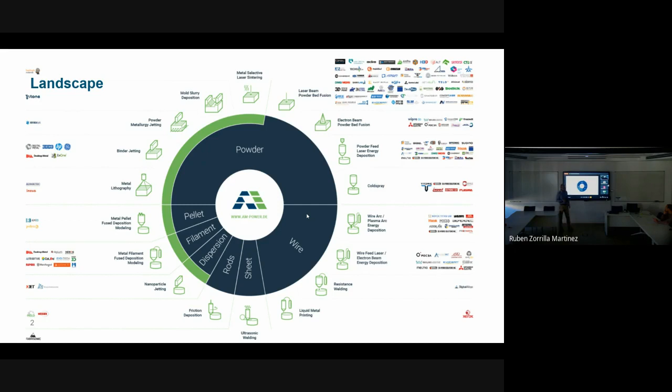For this reason, we started exactly from that place, targeting that market from the Altair side. But we are moving into other areas too - for instance binder jet sintering, where we also have a solver, but I'm not going to get into that in this talk.

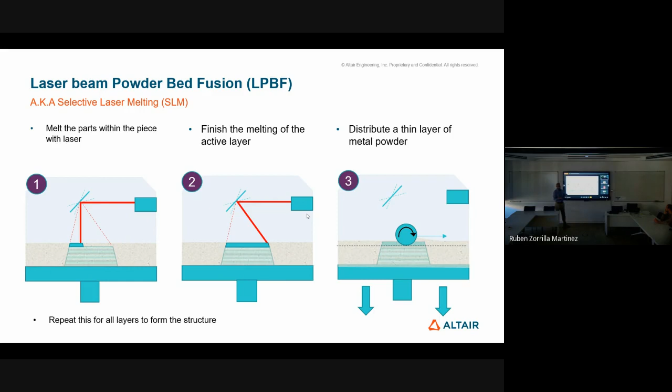So what is powder bed fusion, or PBF? You may also know this by the trademark SLM, selective laser melting. In a very simple description, you have a bed of powder. You start melting part of the powder with a laser, just the part inside the geometry you want to print. When you finish one layer, it goes down, and a recoater comes and puts another layer of powder. Then you repeat this for as many layers as you want until you finish the entire 3D print.

There are many peculiarities in this process. First of all, the recoater has a very slow movement. So there's a lot of time for cooling, which becomes quite important, and it increases a lot the time of the 3D printing itself.

There are many characteristics involved in the quality or final result of the 3D printing. One is the laser power and laser velocity - these control how much energy you are adding to the system. Then you have the layer thickness - a typical layer thickness is about 20 to 30 microns, so it's very, very thin, and this is a serious problem you will see afterward. The laser diameter is also very small, which makes it very difficult to achieve a high fidelity problem.

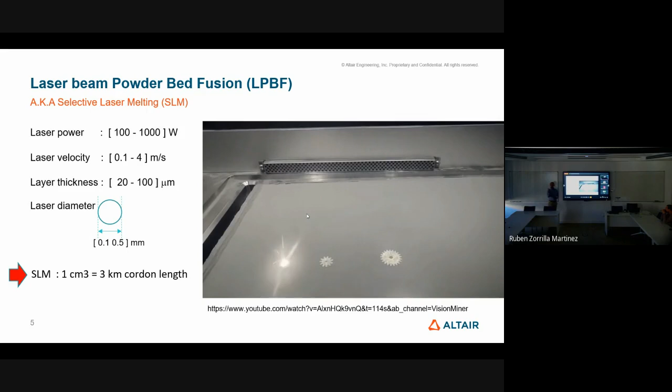Finally, just to understand the scale: if you are printing a cube of 1 centimeter by 1 centimeter by 1 centimeter, the path length is about 3 kilometers. Now considering the velocity is 1 meter per second, you can understand how many time steps you would need if you wanted to really calculate only a 1 centimeter cube.

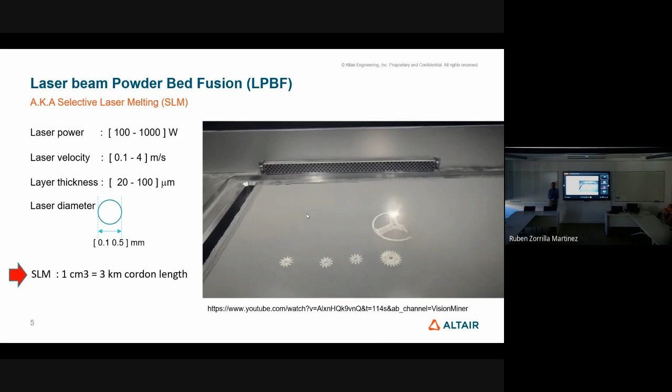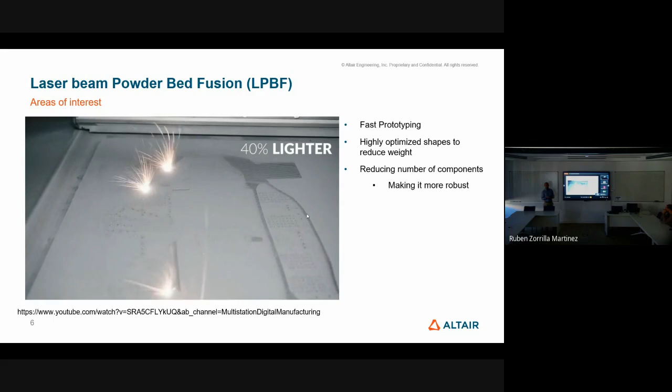You may ask, why is this interesting? In fact, this is not a cheap way of manufacturing. It's not comparable at all with casting or molding or other ways, or even machining.

But it has its own interest. First, for fast prototyping, because you want to test something, you just prototype it, usually even to prototype a mold and then create a real piece.

Another thing is to create very optimized shapes to reduce weight. This is important for aeronautics. For instance, here they claim 40% lighter. This is a brake for the Bugatti Chiron car, a very, very expensive car. They can do what they want, so cost is not important there, the effect is important.

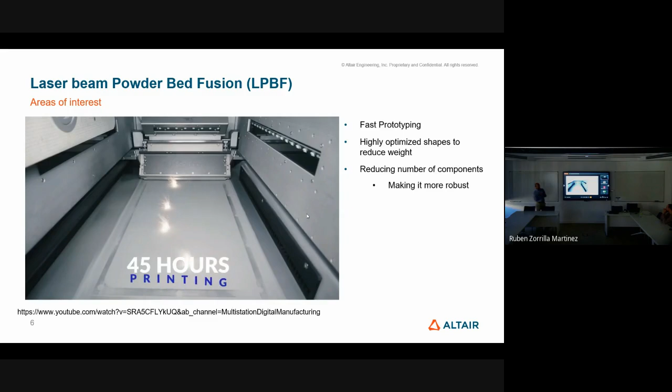Another thing that can change the balance is that large manufacturers claim they are reducing the number of pieces. This not only makes pieces more robust, because if a connection has 3, 4, or 5 pieces and you have only one, then the production chain also reduces to one. So you have much less people to contact with, making it more efficient.

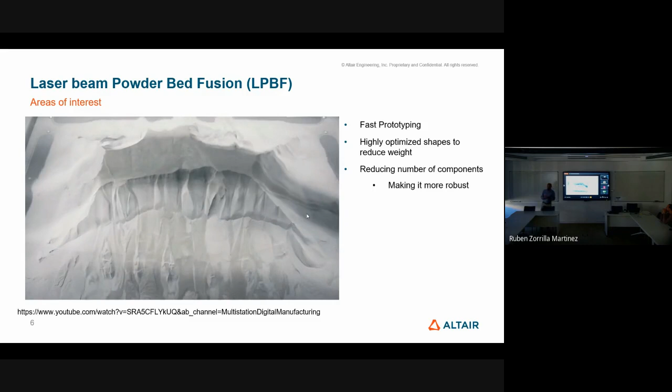But considering all of this, I don't think it can yet compete economically with other ways of manufacturing, but it has its own niche of use.

In theory, you can produce any shape with this technology, which is interesting. There are unique use cases — these guys create radiators, heat exchangers for Formula 1 cars, where efficiency and smallness are very important. It was a block like this, 2 kilos, that can refrigerate a Formula 1 car directly.

They said their ratio of surface to volume is about 4,000. It's very difficult to manufacture if you want a professional one. You can use lattice structures to reduce weight, creating very organic shapes that usually come from optimization.

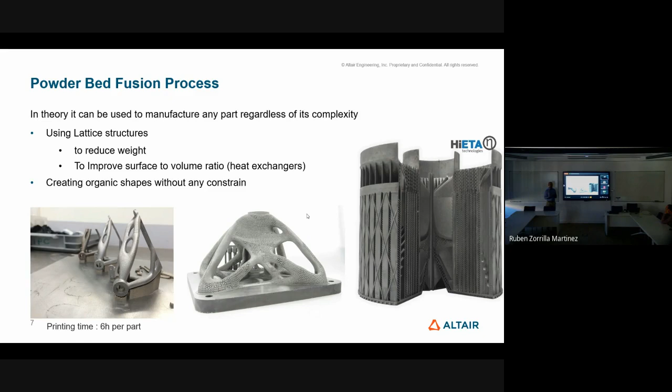But printing is not fast — Michele here knows. For instance, this part was printed in 6 hours. So simulation times are really long, and the delta time is very small. Keep that in mind.

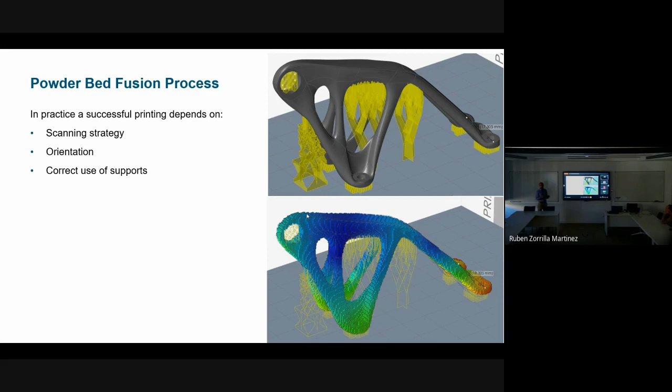So what are the important factors for doing SLM? Basically, if you want to create a correct piece without defects, you should check your scanning strategy, which is important and depends a lot on orientation. The deformation of the piece can change with orientation, and correct use of supports is also important. So in theory you can create any shape, but in practice there are still limitations and practical issues.

There are many scanning strategies, like sequential one-way, but the one used nowadays is this: they put one direction in one layer, then rotate, maybe 67 degrees, which is the standard, or 45. Then they rotate and do another layer, and rotate again.

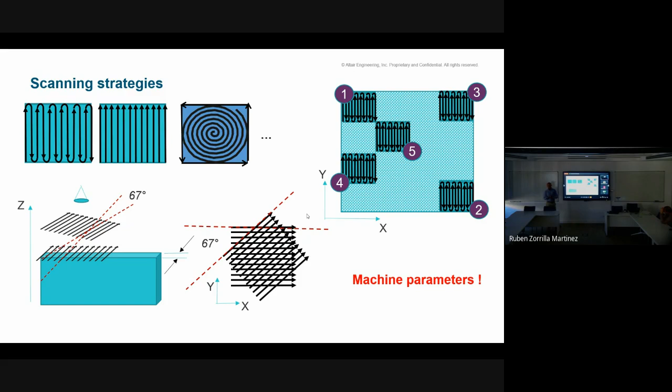Why? If you go to the literature — Michele is here again — we have this same geometry printed in different ways, with different directions and patterns.

These are the normalized deformations of those prints. This is normalized to 1, and this was the longitudinal one. If you printed everything in the transversal direction, you get almost half of the deformation.

But the good point is that with the rotating-layer pattern, you get about 80% of the deformation, but then it's not orthotropic — it's completely, let's say, isotropic in the plane. This is why people usually go for the rotating one.

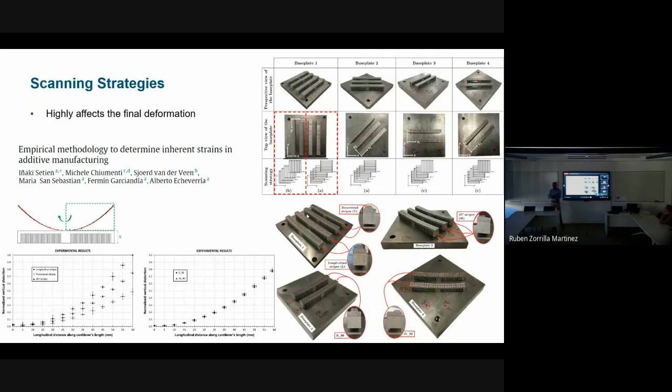Then you have supports. Designing a good support requires experience, but there are 3 roles for the support. They're used for supporting, because we don't want anything to move much. Sometimes we want to support it, so this support should be very small and thin, because we don't want to lose material on that side.

But other supports should be quite strong, because you want to anchor it — otherwise, the deformation of something plain wants to lift up. If it lifts too much, it will hit the recoater, and if it hits the recoater, the printing goes wrong. So one important thing is to keep it in a way that it doesn't hit the recoater.

So you put support as anchor. There are also some thermal problems where some part may get overheated, and you may use support just to connect, because support is directly connected to the base, so it can take out more heat from your system. What is the problem?

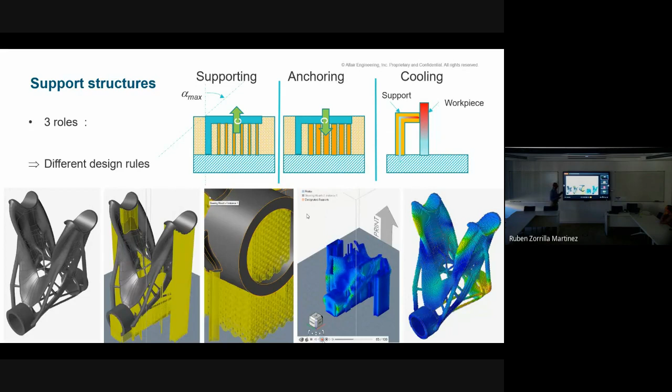The supports, you should then take them out, and this is a manual thing. So you should try to put as little as possible in one way, and on the other way, you should be fine with the deformation and the shape you want to get, with correct anchoring, because if it's not correctly anchored, it will go up.

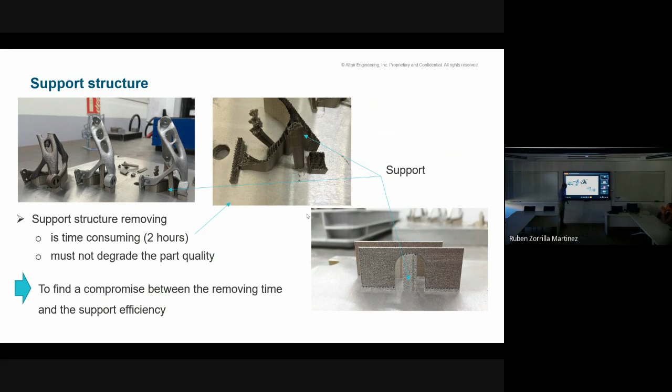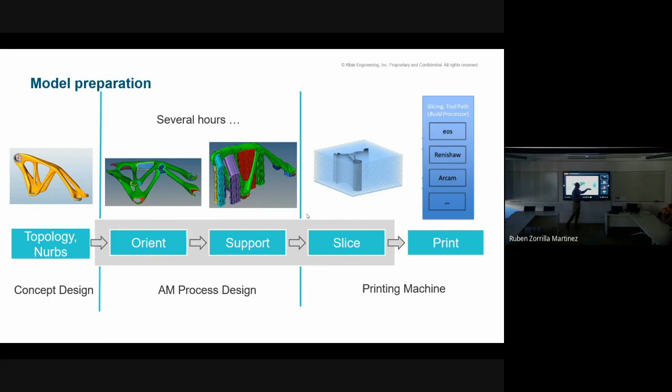So basically, when you have a shape, you should start by finding a good orientation for it, then you should create some supports for it. Finally, there are some geometrical things just to slice it and pass it to the machine, okay?

What are the difficulties of this process, what are the challenges? First, in my opinion, at least when I arrived to this area, with untrained eyes, it was very difficult for me to understand why it's deforming like this. It's not intuitive at all, at least for a civil engineer, just to call it.

For instance, you can see this is a real piece. In fact, I can even show you. Here we have a very important deformation. But the deformation is here, it's not there, for instance. Why not on top? Why is it exactly on that middle top?

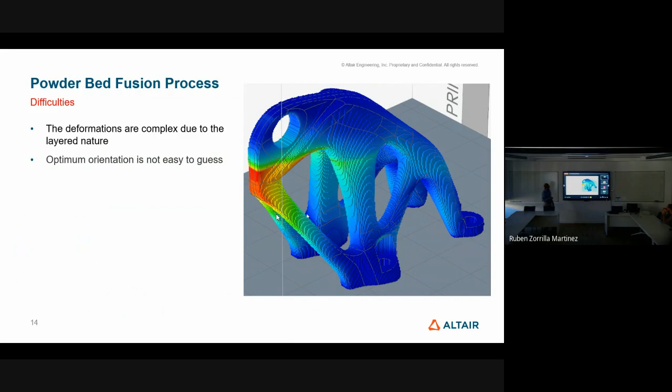And this is another problem, the optimum orientation is not easy to guess. So a priori, you cannot see which one would be better. It's not very easy. In fact, sometimes for me it's still complex to decide which side would be better.

Then creating and optimizing the supports is another story, so we should also go in that direction and have something for it. Finally, residual stresses should be controlled, so they may result in cracks, and there are many reasons for this. I put some references if you want to check the different reasons for the residual stresses, etc.

So in fact, the industrial need is, first of all, calculating the deformations and distortions. Usually what they do is put it another way around just to make compensation, so after deformation you get the correct model. How to orient, they need guidance to try to orient the part, then try to optimize the support, which is quite interesting, and how to create them fast, and finding some scanning strategy, or other machine parameters in general.

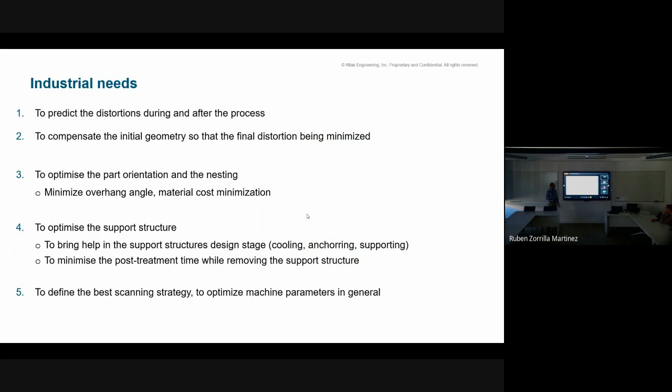Okay, so let's talk about the numerical solution, because I think this is one of the important topics here at CIMNE. In fact, I was telling you that these operations are very, very long, and the delta time is very, very small. So a typical piece may have, I don't know, 10K, 10,000 layers.

The laser beam diameter is 100 micrometers, and the velocity is 1 meter per second. If you want the correct calculation, getting the exact effect of the heat and the gradient of the temperature, which is more important than the heat itself for calculating the material properties, you need an element of order 10 micrometers, and delta T is about 10 to the -6.

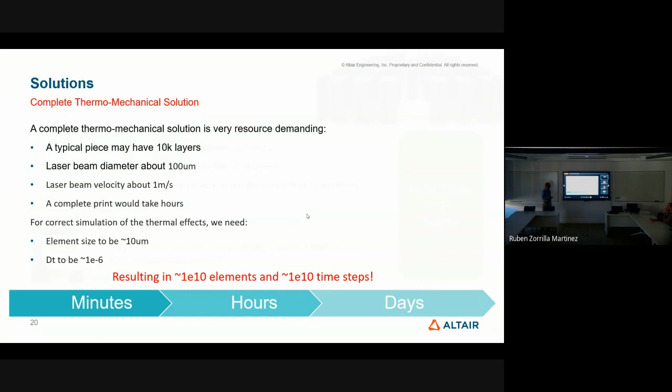Doing a simple calculation for a big piece like the one from Chiron, you will have about 10 to the 10 elements and 10 to the 10 time steps. Basically, nowadays it is not possible. I'm not aware of somebody that can do a real big model directly using a thermomechanical one without anything else. But I know somebody that does this in a more clever way.

So how do people do this? They try to use multi-scale, they try to use adaptive meshing, so they refine the mesh exactly in the layer they are activating, then redefine it, performing even adaptive time, because recoating time is very long but you can pass it very fast, and then when you are passing the laser, the time should be very small. So there are many things you can do to accelerate this.

This is a very important research topic, and I'm personally also interested in it, but as a company guy, we still don't have so much resource, or at least our clients don't have so much resource to do it nowadays in real day-by-day life.

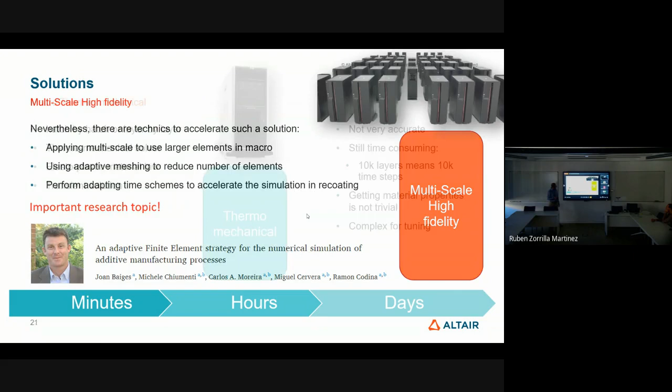Then there is an intermediate solution that people were doing. In fact, that was the previous solver that we had in Altair, also based on this technology. The idea is to go hatch by hatch or layer by layer, using a thermomechanical solver as it is, with elasticity and everything, doing a transient solution, and try to get the result from that.

To my experience, this may be discussable, but they are not very accurate. In fact, in my opinion, they are not accurate at all. They are very time consuming for something that is not well balanced, in my opinion. Using a very sophisticated elastoplastic procedure just for the temperature that you are getting layer by layer doesn't make a lot of sense, in my opinion.

But there are many solvers in the market using this technology, and they are very complex to tune, because finally you don't have the material properties. They give you this powder, but you don't know the exact evolution of the material properties with temperature, because here it's important from ambient temperature to 2000 degrees. So it should have a good table of properties just to replicate this kind of thing.

There are other parameters that you cannot tune very easily. For instance, the powder absorption, the powder density, the powder porosity. There are many things that, in fact, here we have Carlos, sometimes you ask him, but it's not very trivial to be tuned.

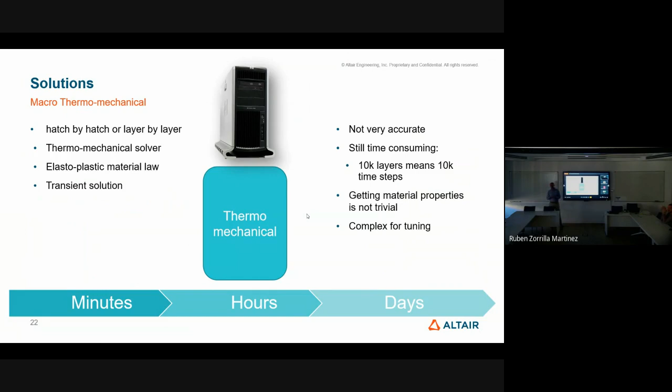And then, putting everything together, we have another solution, which is not accurate at all. Call it inherent strain. This is to have an estimation. But the good point is that if these other solvers need a very large resource and take a lot of hours, this guy is not accurate either, but at least it takes minutes instead of hours, sometimes days.

So that's the main idea. One of the main points here is to understand what you can do with this solver, because you cannot predict many things with it.

For instance, with inherent strain, you cannot do material calibration. It doesn't even have temperature inside, so you cannot, for example, do microstructure, because you don't calculate correctly the temperature gradient, which is the most important thing to calculate the microstructures.

Residual stresses, in my opinion, are not accurate. Okay, they give you some idea of where it goes, for instance, relative to the yield stress, which is the most important result usually people want, because they want to see if during printing it will break. After printing they put it in an oven and usually reset the internal stresses. But before that, they want to see if during printing, for instance, some parts will break, and there it may give some good estimation.

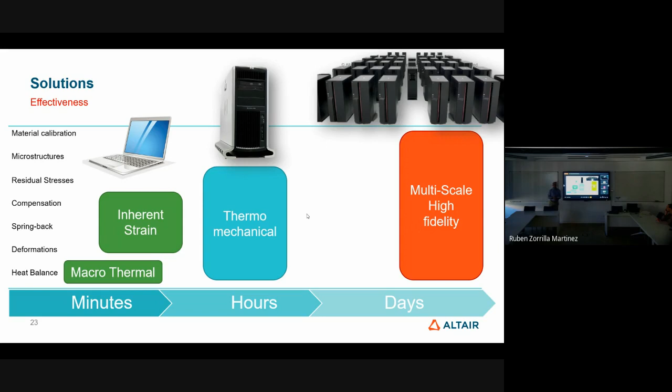So what is the inherent strain methodology? In fact, it's quite simple. It comes from considering what are the sources of deformation that we have inside the PBF. First, we have elastic deformation and plastic deformation, the mechanical ones. So this is an elastoplastic solution. Finally, you should use it. We have thermal deformation to account for shrinkage.

We have phase change deformation, because when you melt and then solidify, there's a big shrinkage during solidification. And we have a discontinuity by layer. So in each layer that you put over the other one, there is a discontinuity, they are not continuous when you deposit. And this is something important to consider. Your total strain is a combination of all of these together.

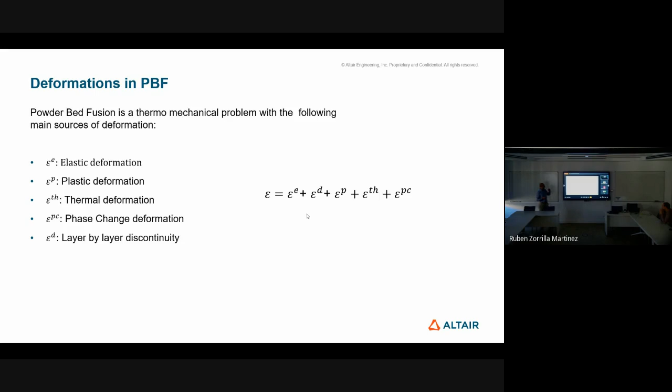Saying that, people have been using inherent strain in welding for many years, since the 90s. The idea was that you take your normal strain and say your strain is a function of your mechanical strain and the strain induced by shrinkage. And in welding, they have formulations for how to calculate this induced strain, or inherent strain.

And that inherent strain, they put inside, let's say, the equation of state of your solid equation. Then they usually do linear elastic, or sometimes elastoplastic. In fact, in welding, they do an elastoplastic solution, and with that they calculate a deformation which is a good estimation of the total deformation. What's happening is they are not using temperature here, so it's not thermal at all.

The trick is that they are assuming that this was hot, and the entire shrinkage applied directly to it. They calculate the shrinkage that they have basically until they arrive to the ambient temperature, and then they apply it in a way to that. This is basically the main idea.

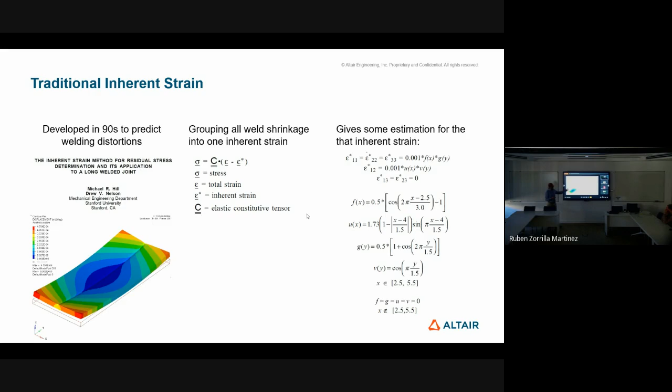So having that, people said, okay, next step, let's put it for the additive manufacturing. And in fact, there were people who started thinking and putting it in a very, I may call it, first step way or rudimental way. They were using mainstream solvers, so they tried to mimic the inherent strain with some type of temperature changes in the material, inducing that strain by adding different initial temperature and putting everything to the ambient temperature. So it was trying to refigure itself.

When I saw this paper, I remember that I read it, and then I said, how did they tune it? And then I read it again. It wasn't very clear. In fact, in my opinion, it was like they were getting a very strange way of calculating what is the inherent strain. It wasn't so clear.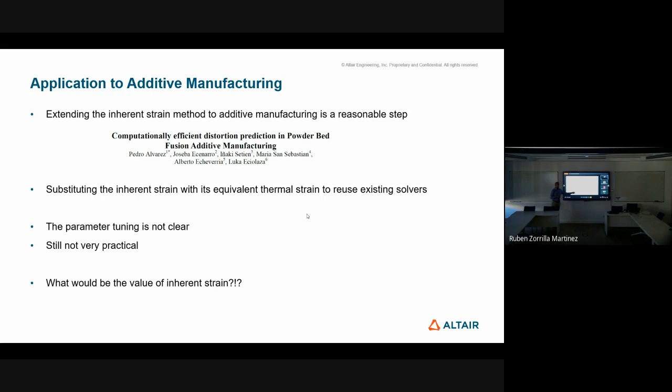So how it works, now you can see it. Here we are saying that, okay, we have our epsilon, which is the elastic epsilon, deposition epsilon, plus the plastic one, thermal one, and the phase change.

I put all of them together in one, call it epsilon inherent, and I calculate this epsilon inherent via a calibration. So you do this calibration specimen, there are several of them. This is called Payne, or there are people who call it caterpillar, depending where you use it. So the idea is that you should just print in the same way and in the same parameters of the machine that you want to print your piece, this Payne.

When you have it finished, you just take it out and calculate the curvature of this scale. With this curvature, you can calibrate your solver, saying that, okay, this is the calibration, it will find the inherent strain for you, and from that point, you can apply that inherent strain to your normal mechanical solution.

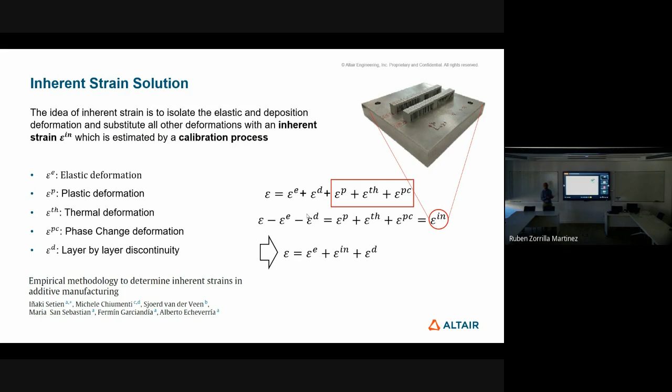Then I said that the total strain is this one that I calculated by the mechanical solution that we have, the normal one. Then we have the inherent strain that arrives with the calibration, and we have the one that we call the deposition.

Why? Because when you have one layer and you put it, in fact what happens is that this layer gets deformed. Then you put another layer, but the other layer is in the original position, it's not in the deformed position, and it gets another deformation. So each time you have a difference between these parts.

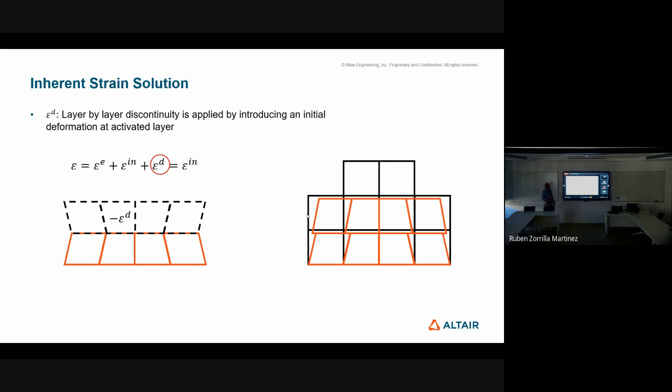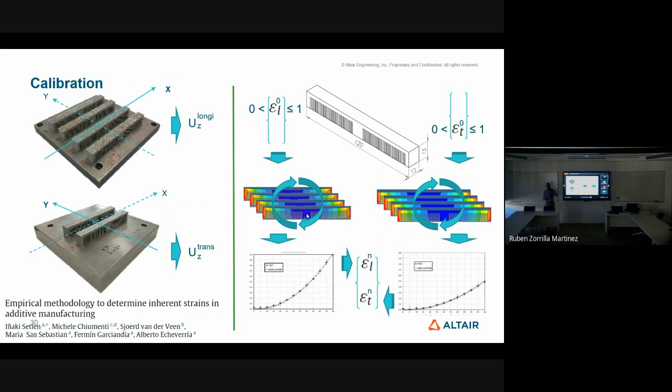Then, again, the procedure of the calibration, which is important. So you can even calibrate the pieces when they are not isotropic in the plane. And for that, you need to do different types of scanning and then combine them together to get an orthotropic inherent strain that can be used then directly inside the mechanical one.

So what are the advantages of this inherent strain? First of all, calibration is very easy because it's only one piece. You put it, you calculate some curvature, and that's it. It's linear, it's fast, and can be used effectively, for instance, for the compensation plan.

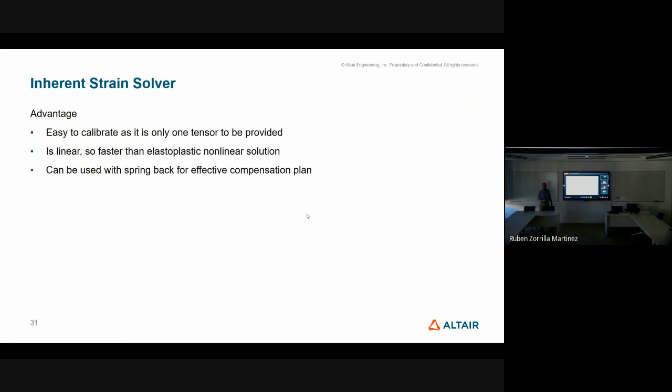But there is no free lunch. In fact, the residual stresses may depend highly on the temperature evolution. There are papers claiming that they do this Payne test. This Payne usually goes up, so your inherent strain is negative usually. In some configurations, to make it even, it goes down, which is completely wrong. So this calibration may give you a wrong result. In practice, it's very difficult to get that situation, but at least if it exists, it means there are limitations.

And sometimes it's not very easy to have only one inherent strain for all your pieces. Basically, depending on what is your temperature and temperature gradient in space, not in time, you may get different results for the inherent strain. In fact, there are people suggesting using different inherent strains depending on what the temperature is.

So there are improvements to be done. But the mechanical solver, to be honest, is not very difficult because it's finite, it's linear, it's quasi-static, so we start.

Now I wanted to tell you the methodology, how we implement it and where. In fact, I'm working in the manufacturing group of Altair, and we work on different manufacturing solutions.

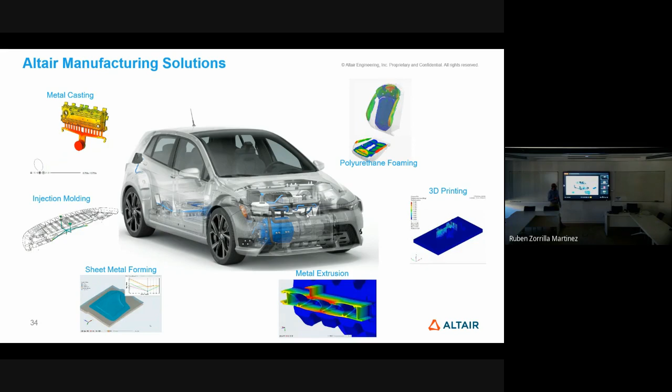I don't know why it's not going now. It should go. Okay.

From this one, there are three that I personally work on. One is casting, as the first one. This has casting, solidification, cooling, and cycling - a lot of different processes. This is a very mature solver right now.

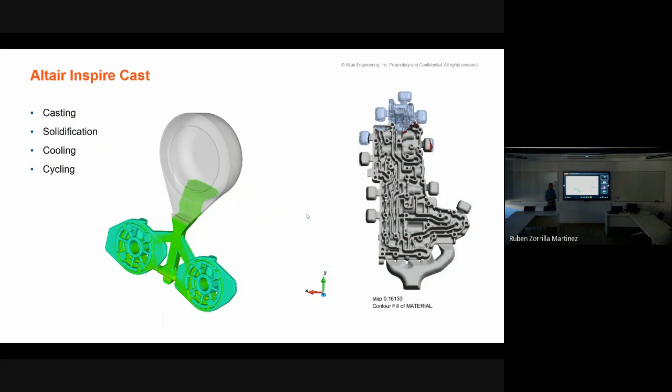Then we have the molding one. This is by far the most complicated solver I have written in my life. Here is one of the very few cases I know where the thermomechanical problem is two-way, not one-way. So it's not that you calculate the temperature and then go for the fluid, calculating the Stokes. The fluid is a Stokes, so that's not very difficult.

What is problematic is the shear heating, which means the energy released by the strain of the polymer gives a lot of temperature. And polymer is very temperature resistant - the diffusivity is very low, it's not a good conductor. And this makes it very, very tough.

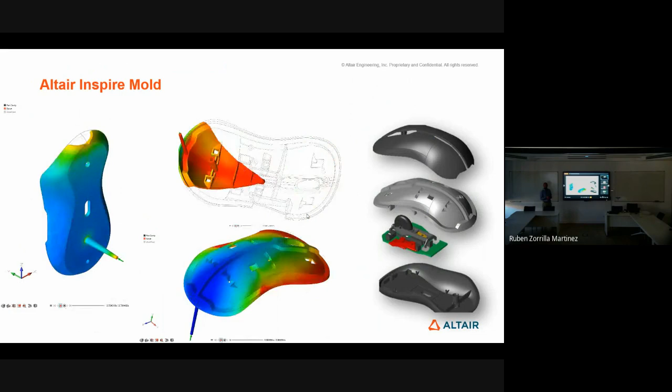In fact, if you don't take into account that strong coupling, it doesn't work - basically you cannot fill it. It's a very tough solver, this one.

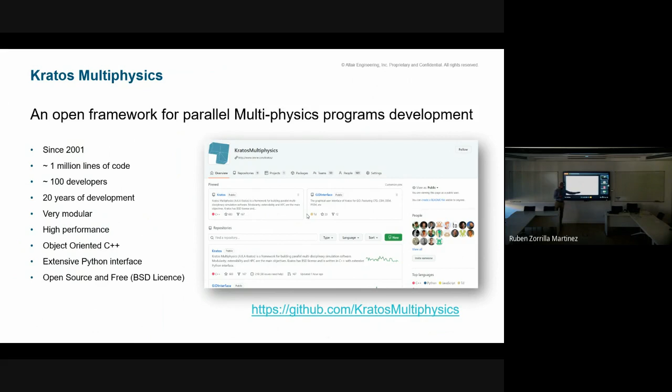All of these three at least - 3D printing, casting, and molding - are based on Kratos. I don't need to talk about Kratos here; many of you are already implementing it. For those not implementing it, you can always join the project inside GitHub - it's an open source one.

Okay, so the solver by itself is very simple. In fact, we use directly the structural solver of Kratos without any tweak on the side of the element technology. So it's quasi-static linear.

We're activating layer by layer. We can use tetrahedra or hexahedra. In fact, we can use quadratic tetrahedra and hexahedra.

And you can see that we have a very sophisticated voxel mesh also, just to calculate in case the solution is given by STL - it just takes it and calculates very fast. Something that I should export back to the core of Kratos.

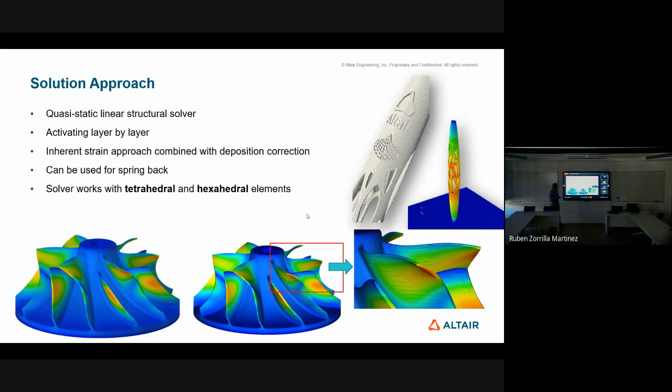But doing inherent strain is not the whole work, because first of all you should improve it for performance, because by the way this linear solution of the structure is very fast - if you have 10,000 layers, meaning 10,000 time steps, this will need a lot of time.

So what we try to do is ask: how can we activate more than one layer together? But if you activate more than one layer, you have a serious problem, because that discontinuity inherited by the layer-by-layer powder deposition needs to be taken into account in some way.

We did some study, and there are papers claiming you can do about 3 layers. In fact, it says that if you go for 3 layers, the error is 11%, and if you go for 4 layers, the error is 52%.

Then we took it in another way. We checked that we could do something quite interesting in the element itself, and finally we came up with our way of lumping that. As you can see here, this was for a layer thickness of 0.02.

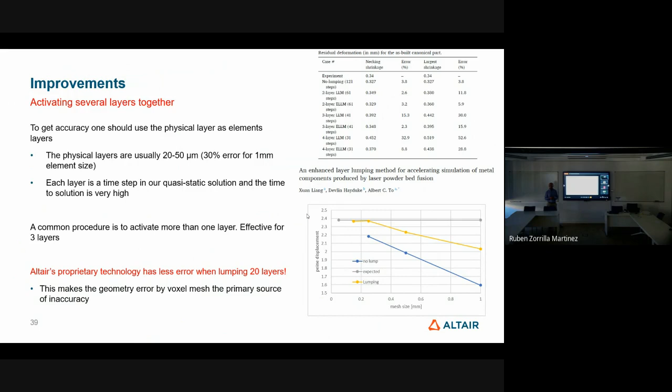There are sophisticated things about robustness, because with 3D printing you cannot have hanging things, or something like this, because when you're printing this side, it's not supported at all. Our solver is implicit, so it will directly crash. We said okay, this part is not printable, until we found out that there are people printing something like this. Calling them crazy, but they are.

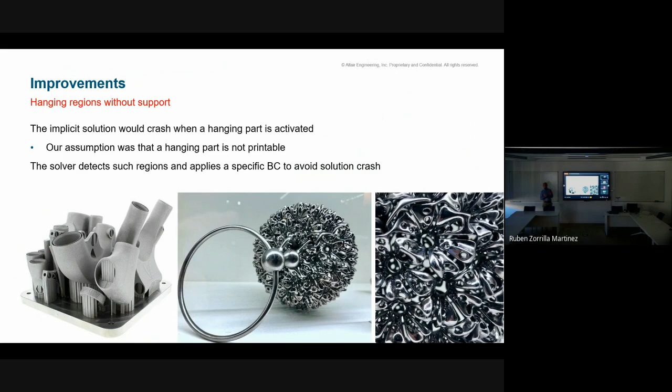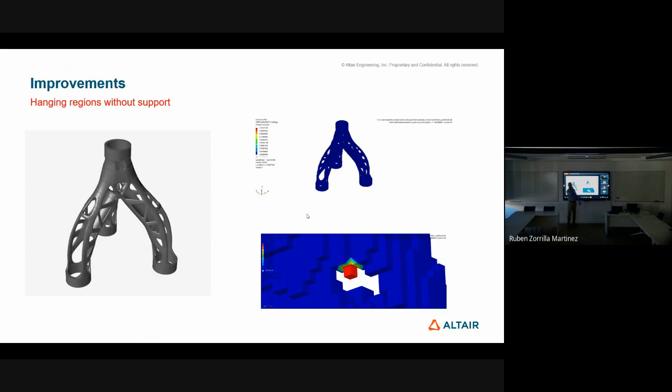So we said, okay, how can we make our solver robust? What we did is try to find that boundary condition, find those points, and apply some special boundary condition to not explode the result, but keep them in place. In fact, we found that sometimes the model is good, but due to the voxel mesh, you have one hanging voxel there, it arrived there, boom, it went to that.

Another thing we found out in a practical way that we should deal with is that the product guys didn't want users to fix the piece just to have the spring back. So we said, okay, let's implement the inertia relief as many other codes have, and we implemented it.

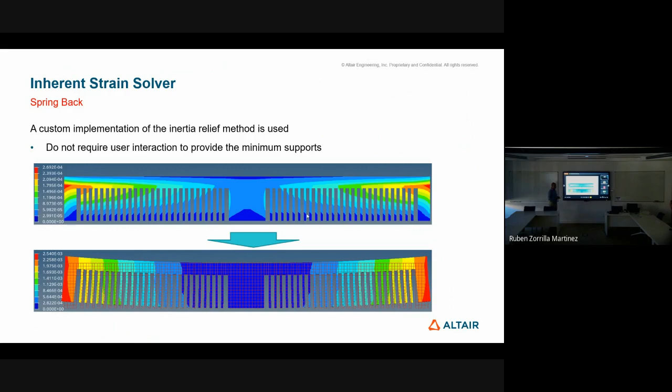But then we realized that we cannot use it easily because it needs a direct solver. It wasn't converging at all with the iterative solver. So finally, we had to reformulate it a little bit in our way, just to make it again linear solver, let's say iterative solver compatible. It worked quite well for our case. In fact, it never failed from that time. So we're happy on that side.

And then we said, okay, let's do some benchmarking. In fact, we did quite a lot of benchmarking. The bad thing is that usually what I don't like about 3D printing is that when they give you the data of the benchmark, they always say that this is confidential. I say, okay guys, you may give us some model that is even open. So a few of them we have open to just show you here, but usually you can see that you can even check for the different type of the inherent strain in orthotropic one.

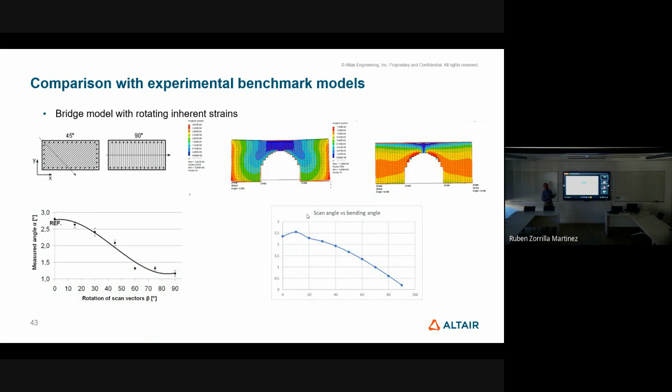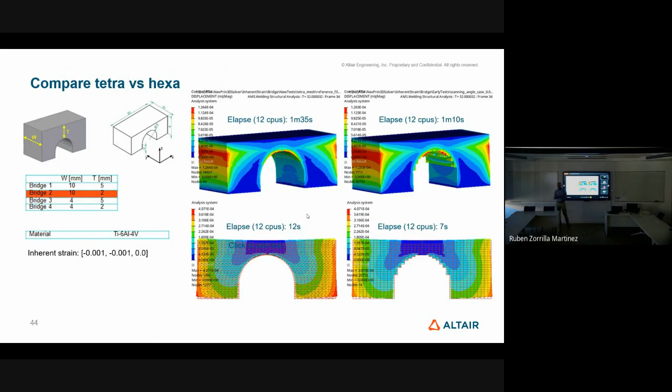The deformation is quite good when the case is for inherent strain, I can tell you. We also test, for instance, how different the result is that we got from the TET and hex element, just to see which technology we should go with or what are the errors there.

And with that, now when we saw that okay, the solver is working well, we said okay, let's put it inside a product. And here comes the work of our colleagues from the GUI, in fact from Martin, you know him, many of you here. So this is the interface that is behind the solver.

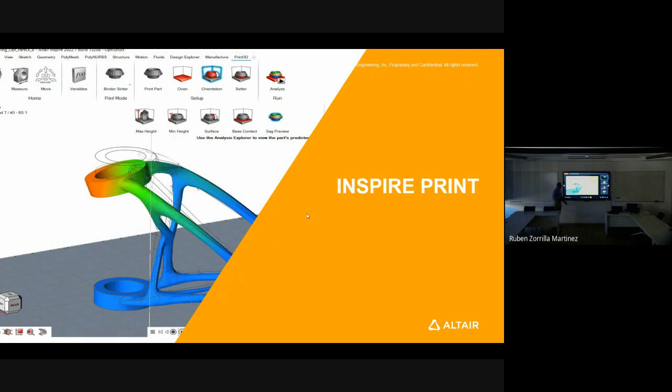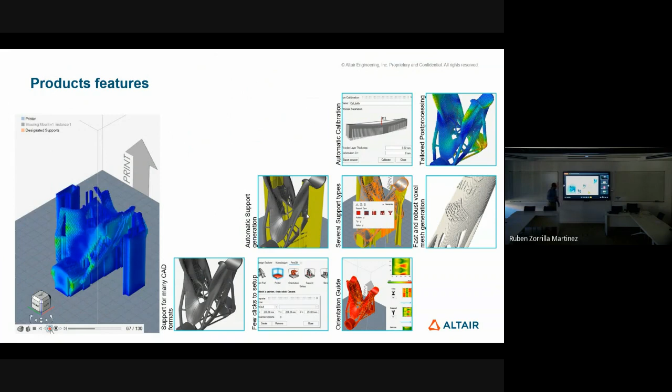This product, we call it Inspire Print. It has several features to help you, for instance, to make the supports, create the supports. It has automatic mesh generator, has tool for calibration. So there are things that you can use out of the box. If you want, I can make a demo afterward if you have time.

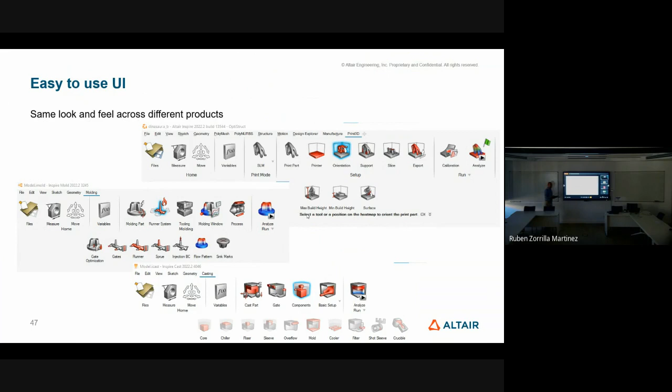Then what is important is that this is the ribbon of the 3D printing. The good point here is that first of all, it's very sequential, so you go print part, printer, orientation, blah blah blah. But the look and feel is very similar to what we have for mold, for instance, or what we have for cast. So it's quite easy for our engineers that give support to go from one application to the other and replicate an error or try to help the users. And also it's easier for users because they are the same people.

Saying that, we have sophisticated tools to help you on orientation. So basically, when you open the model, it will give you some maps and tell you what are the optimum orientations for which goal. For instance, we have for less support or reducing the time of the print. So putting it in an orientation that is less height, basically. Less support means less hanging parts or less anchor.

There is one plugin that we have from another company that says they also optimize for deformation. I don't know what they do, their confidentiality. So these tools are designed to help you figure out how to orient your piece, because it's important.

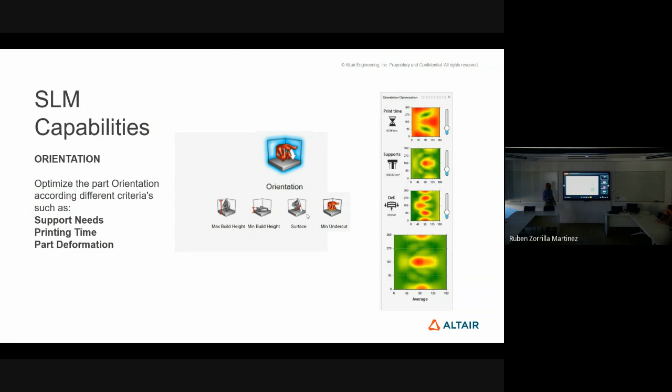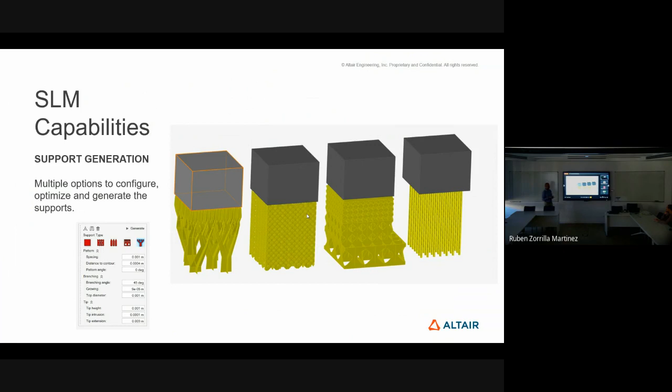Then we have tools to generate support by one click, almost. So it's like you can change from this support to this and to that, just by clicking here. As simple as this, so you just recreate them and you can parameterize them. And there are post-processing capabilities, basically, that show you very simply, taking out the supports for instance, just to visualize the things that are important.

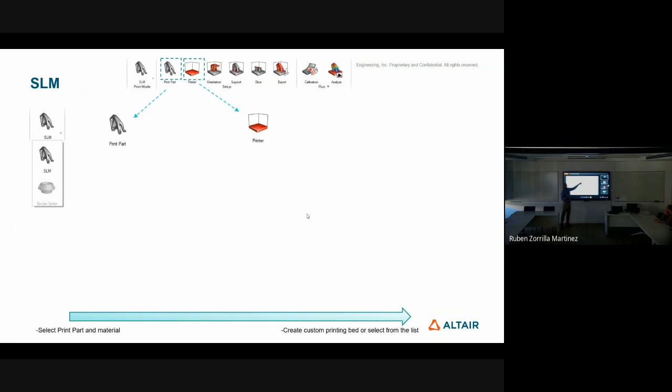The workflow is that you start with some print part, then you create a printer. Usually the default value is quite good. So here's the part, you put it inside the box of the printer. Then you go for the orientation, using that mapping to orient it to some orientation.

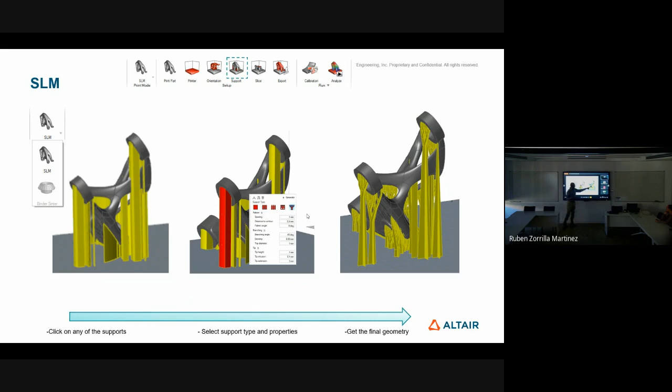Then you start to design, go to the supports, and create the supports. It creates for you automatically the supports with the angles that you need or that you're specifying. And then you can personalize them, for instance, in this way. When you have them personalized, then you go for printing, so you have the final shape.

And then, for instance, you can slice it just to visualize what the slicing looks like, if some parts are very close to others, for instance with the supports, or you can export it to some other machines.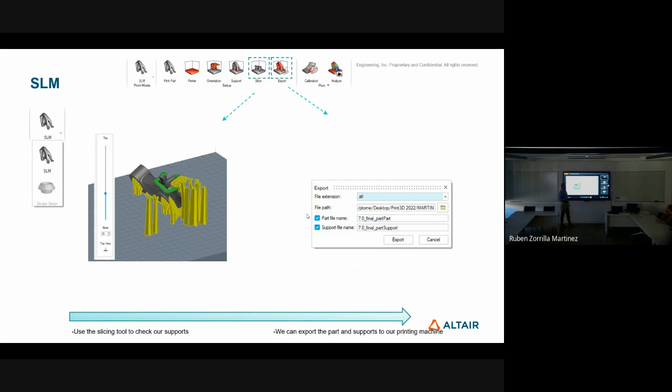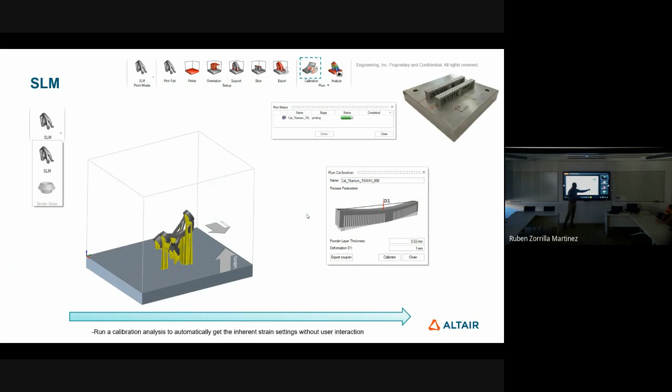For running, you can run a calibration. So you will put the calibration, you calculate this, just cut off this part, and you calculate this thickness, this curvature indicator. With that number, you give it to us and we calculate the calibration for you.

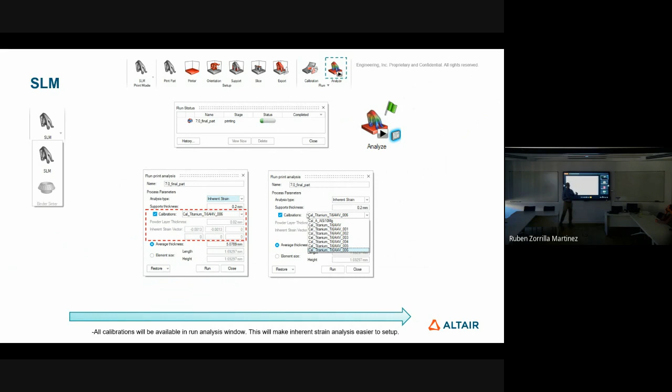When you calculate it, you save that calibration in some place. Usually it depends on the name of the material, the velocity, and the parameters of the machine. You can store it and reuse it for your real calculation. So everything here is mainstream, let's say.

And then you can post-process it in different ways. But this is only the product.

Just give me two minutes more to give a bigger picture, because this product is in the chain of other products, to be honest. So its value is not only calculating 3D printing.

The value comes from the fact that if you have some piece here, how do you get an optimized piece. And this is the important point. You know, they start, they do some space for optimization, they do some optimization—there are several tools in there that you can do that. When you have this, you may decide how you want to do it: casting, machining, molding, or maybe you decide for 3D printing, for instance.

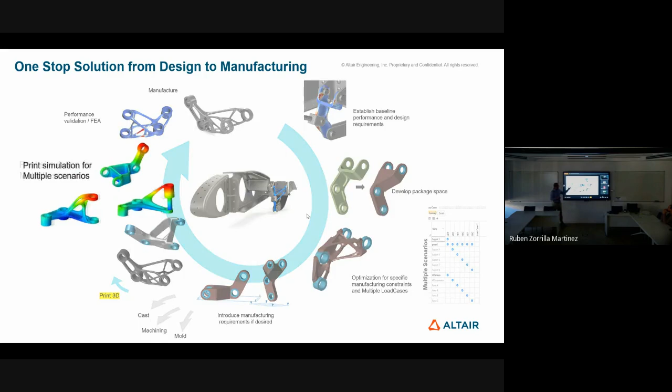If you come here, then from this model you can have several prototypes, depending on the spaces or the manufacturing conditions that you have put in. And from those, you may choose—say, okay, but I have several scenarios here, which one should I use?

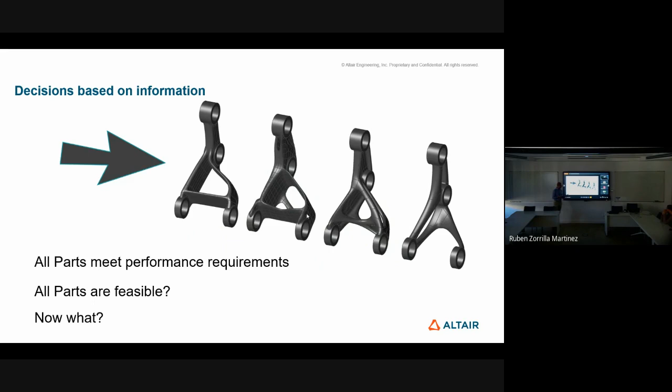Say, okay, let's do a part study. All of them have the requirements, all of them pass the mechanical test, all of them are feasible. So let's reduce the cost.

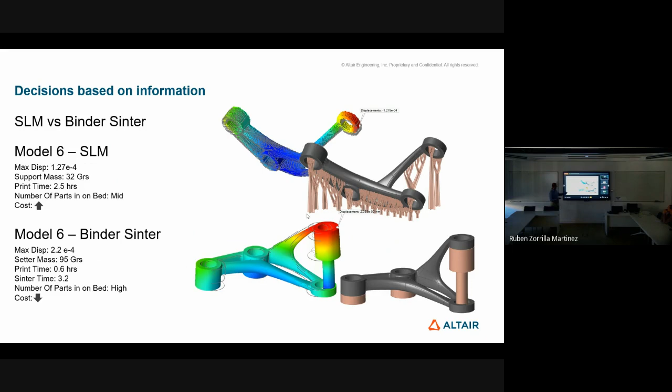You may try to reduce the cost first, trying to see if it's better for SLM, for instance, or Binder Jetting. You see that SLM at the beginning is higher cost than this one. But what happens if I reorient it? So I check the reorientation and I see that now model 6 seems better.

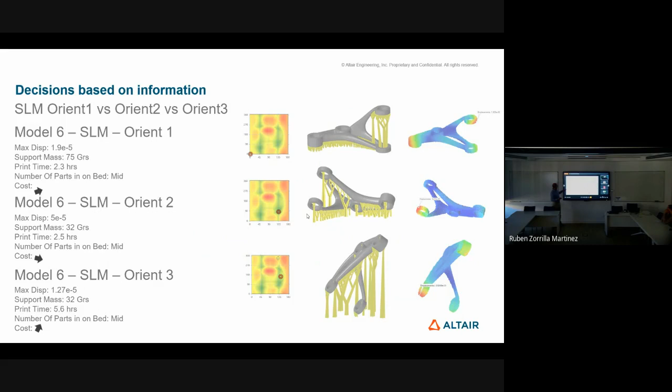And finally I can check it, for instance, with Binder Jetting for the real manufacturability, and see that first of all this is not feasible—this is no. So I arrive at saying that, okay, it seems SLM is working better, and I can have a design that I can send to the person who should do the final real calculation.

But the good point is that all of this cycle is done in 10 hours by one person. So this is the main thing: not only having a solver there, but having the solver connected inside the whole ecosystem. That's something easy, which is interesting.

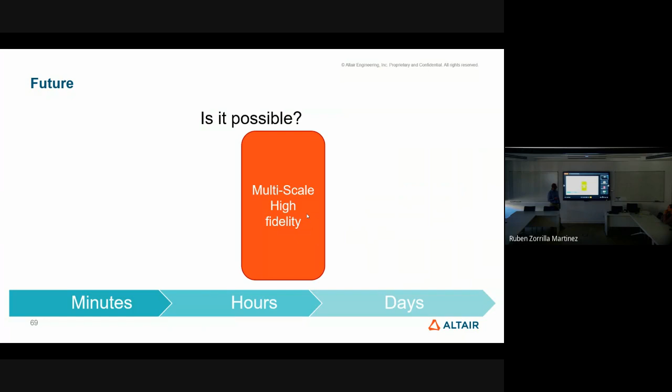So with that, I arrive at the next part, which is only one slide. We were talking about multi-scale, high fidelity. My question is: is it possible to do it faster? And I think this is a very important open discussion to have. Thank you very much.

Thanks, Pooyan, for the presentation. I think there are no questions in the chat, but if there are questions in the room or comments, go ahead.

About confidentiality, you haven't told anything. Nothing—yeah, but some of it I can't. At least I told some of it.

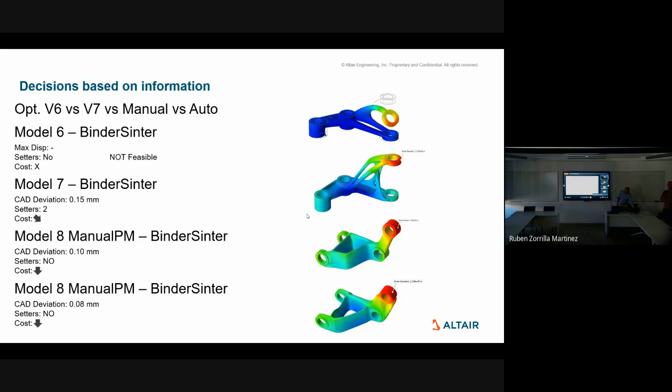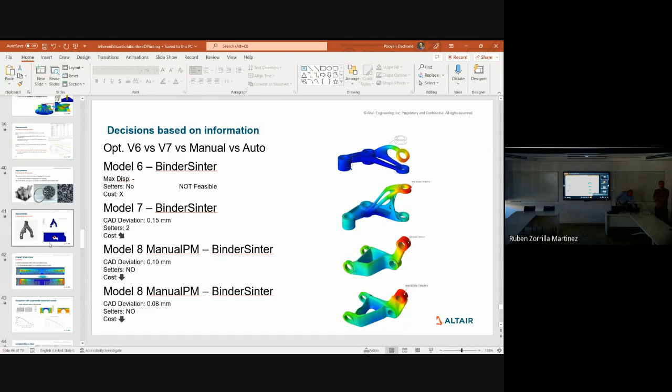Yeah, this is the paper — in fact I read it today. I remember them. The idea is to get an offline database of inherent strain based on the same idea, on the base temperature and on the jump of temperature. So at the end, you still need the thermal solution, at least to choose which inherent strain to use.

Yes, in fact these are the guys, I believe — it's a Chinese researcher. Almost half of them, at least the boss. Yes, Qian Chen, or the boss is Albert To — no, this is not this guy, this is another one, but he's also good. The one at the conference was Yao, I don't remember the full name. I had it, okay, I lost it.

But well, just to say that this is in our roadmap — we want to do this, time-dependent enhancement. The problem is, I'll just anticipate, there's still a problem that exists.

To generate this offline database, they do it using coupons or using high fidelity simulation. But the problem is that one of the conditions, the boundary condition of this coupon, is that what you are building is on a substrate. But if you build something as difficult as this, where there is no substrate because it is in the air, you don't have this kind of constraining. So the inherent strains that you are using, even if they are better because of temperature, are still wrong because of the boundary constraining.

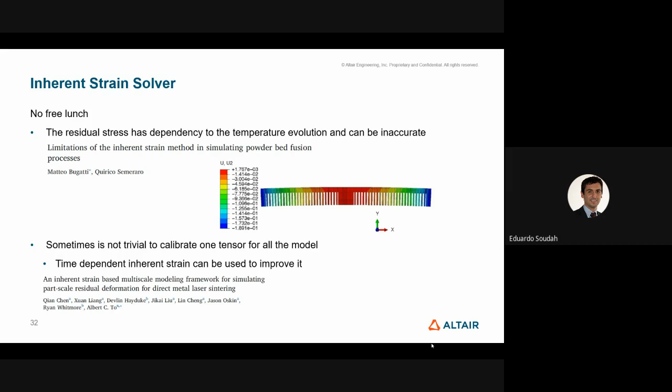You can say it, yeah, okay, just in order to know, just a curiosity. Yes, thanks Pooyan, gracias Pooyan. Thank you, gracias. So is there any other question? No, I have a curiosity, just a curiosity.

How many people are working on the GUI and how many do you have on the solver? In the solver side, across all three manufacturing means - casting, molding, and 3D printing - we are 6 at the moment, 7. And in the same way looking at it, on the other side, I think they are 8. So same people in solver as in graphical usually.

Yeah, okay, that's just a way. They are, in fact, 10, but if I want to count all the other solvers that they are giving support to, they are giving much more support. So they are about 3 others, let's say. No, but there are plenty of them - for many years they were doubling us. In fact right now we are 6 because recently we got Vicente and we reorganized a little bit.

Okay, so I have a question. In terms of shape optimization, do you know how often reduced order modeling or other surrogate models are used for the shape optimization phase? What do you mean about surrogate modeling? A simplified surrogate model for the optimization to be faster, since I understand optimization must be a very time consuming part.